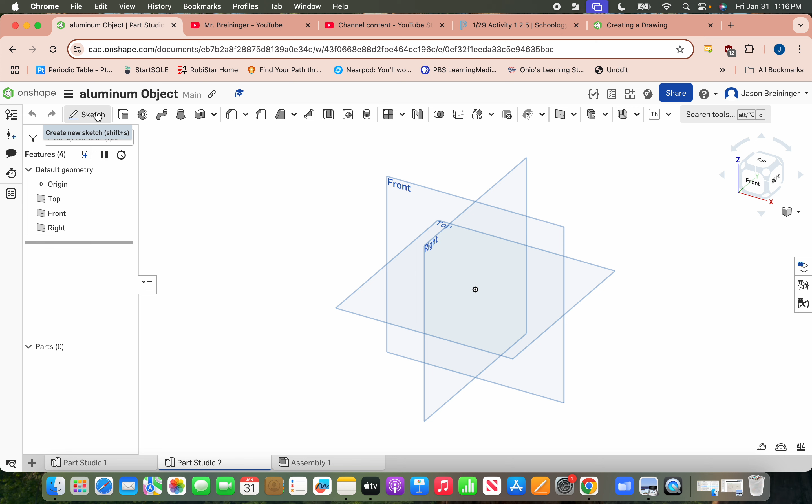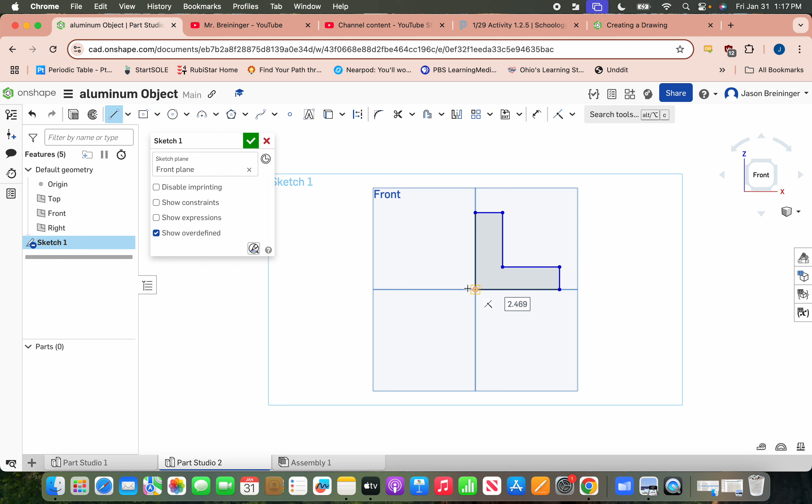I began my sketch on the front plane by drawing a rough L shape without worrying about the dimensions that I was setting. It's good practice to put your sketch on the origin. The dimension for the bottom line was 1.75 inches, and for this top line was 1.25. These lines here were both 0.5 inches.

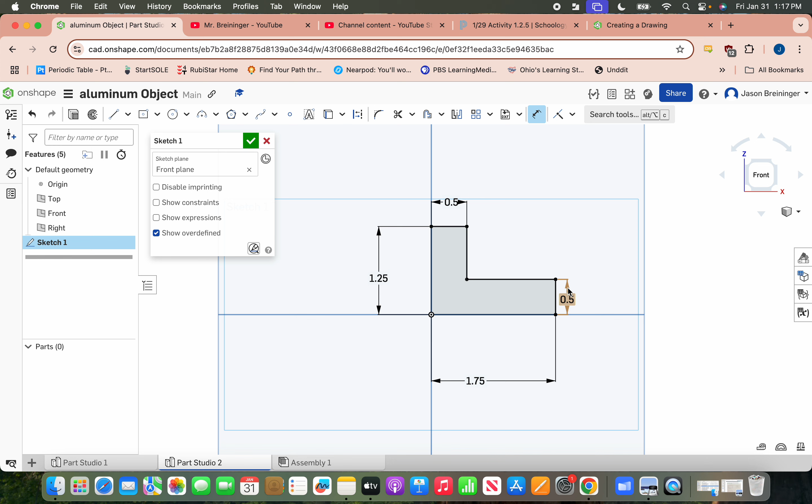Once I have this L, I can hit the check mark. Now I can extrude this object to the depth that I need. If I go back to my previous part studio, I see that my extrude depth was 1.25 inches. I now have the basic in order to create this.

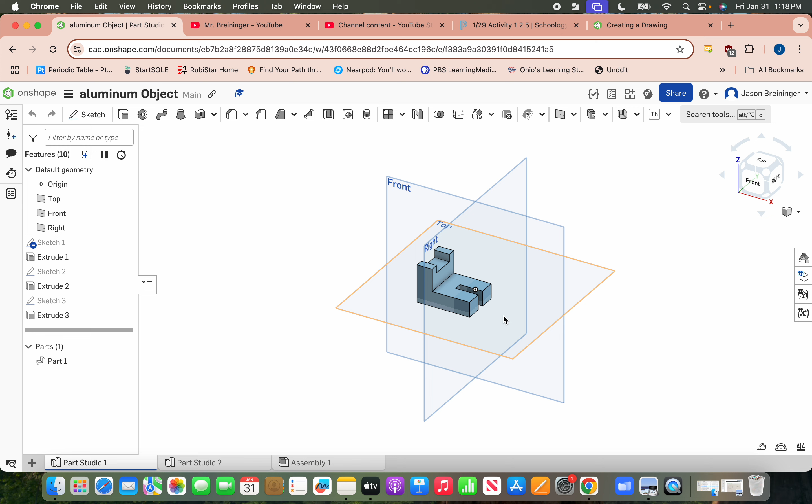What I'm going to do is use a method called subtractive modeling to cut away this top part and this bottom notch here. I'll start with the top. I will sketch on this front plane a corner rectangle. Notice how the top line of this shape is highlighted. That means that this rectangle will be bound to that top edge.

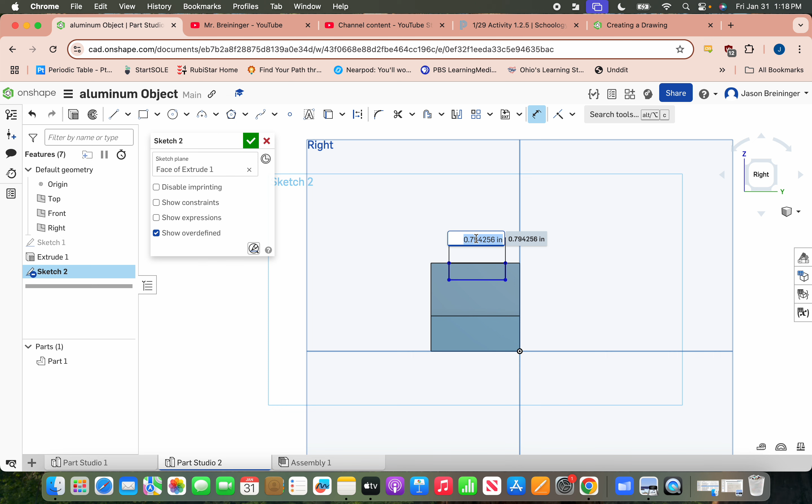The dimension of the long side was 0.75 inches, and the short side was 0.25. I also need to center this rectangle onto the part. To do this, I will first click on this line, then click on the line that I want to put the dimension towards, and make that 0.25.

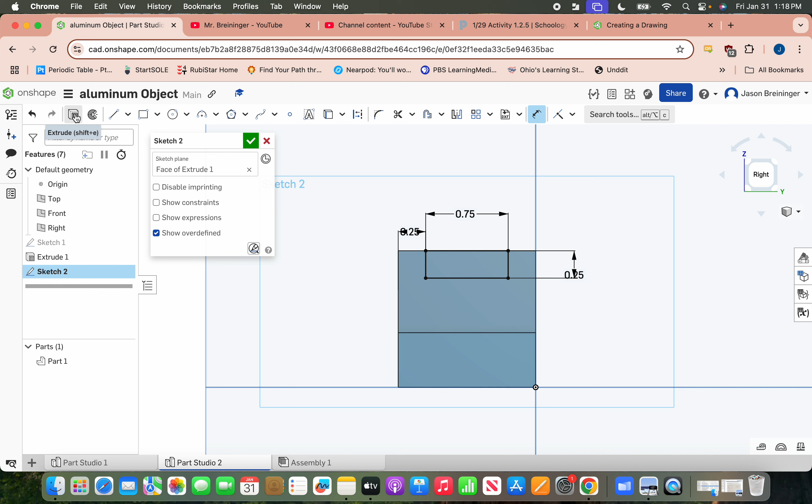Now I can hit extrude, but instead of adding, I want to remove that section. Once I hit remove, I can hit check, and that section has gone away. Finally, I can begin a new sketch, this time on this face of the part. View normal to sketch plane.

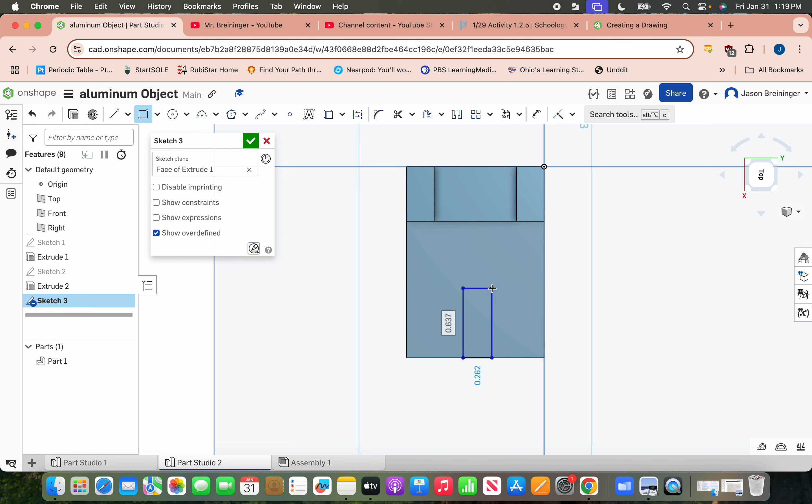And again, use the corner rectangle tool to draw a thin rectangle approximately centered on the part. The dimensions for this rectangle are as follows. For the long side, I will make that 0.75. For the short side, I will make that 0.25.

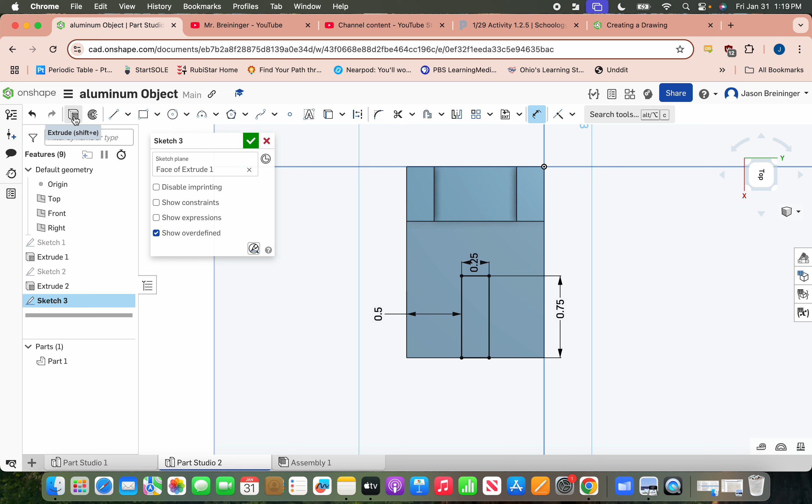To get this centered into this part, I will click, drag, highlight this side, click, and make that 0.5 inches. I can now hit extrude and remove. Now that I have the part created, I can assign it a material.

If I click into my parts drop-down list here, if I right-click on part 1, I see this selection for assign material. When I click on that, I should be defaulted into library, OnShape material library, and I see that right now it has no material selected. OnShape's material library has a lot of different loaded materials that you can use to simulate how much your part might weigh, or look at the modulus of elasticity, or the density.

And for this, we're going to use aluminum. There are many different grades of aluminum that we can use, but for ours, let's just stick with regular old raw aluminum, which is this one right here. Once I hit check, nothing apparently happens.

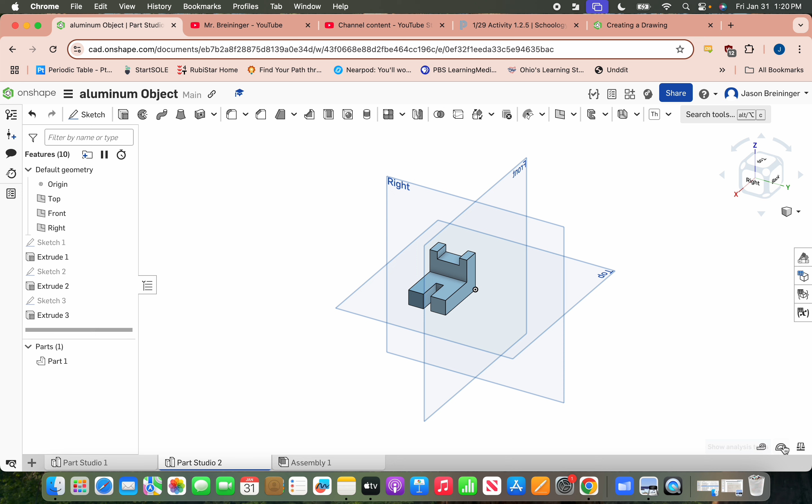But if I use the bottom right of the screen and click on my part, I can now get the mass, the volume, and the surface area of the part. These will be useful in completing the assignment, geometric properties of solids.